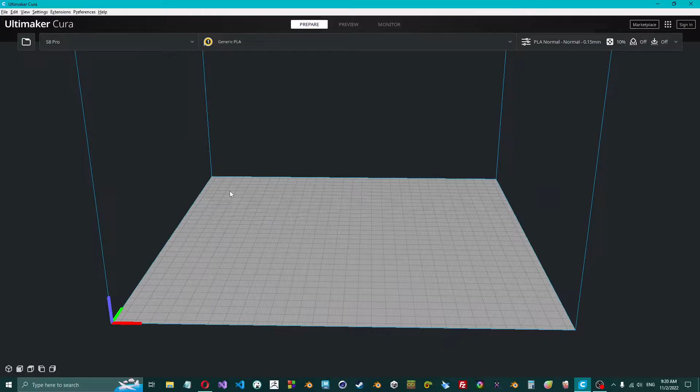So, we're going to go over some tips in Cura to make your prints a little bit faster and maybe to make it more structural. So, let's just load in a generic print that I've done recently. Let's try this little storage container. So, I've got my S8 Pro loaded up here in the left, and we could use this for any printer really. We're just going to use the S8 Pro since we have this larger build platform.

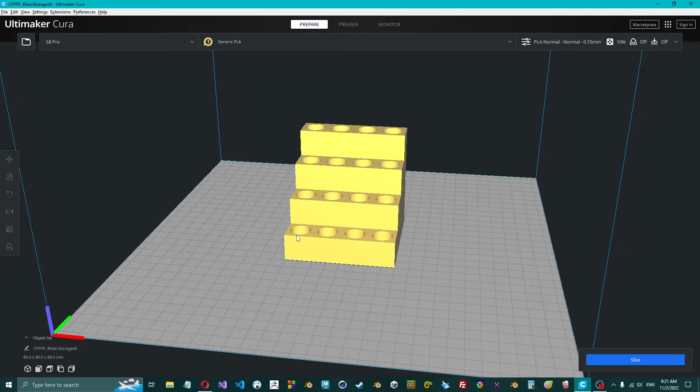So, let's go over some settings first. You might not see all of these categories at first. And so to turn these on, you might be in this mode. You might be in basic. And the thing is, basic is great when you're just starting out. You have a couple options, not too overwhelming. Each category has a couple things to change. You still get different infill options.

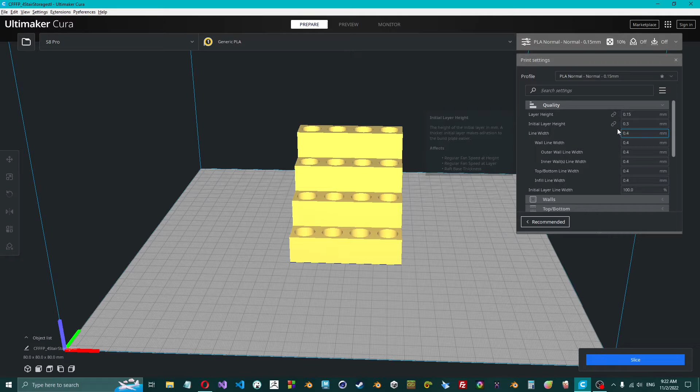This is cool. But if you really want to start printing some faster prints, I'm going to show you how to do that. If you come over here and click all, this is going to give you a lot more modes and options for us to play with. So the first thing that we'll talk about is quality. When you're printing, a 0.2 layer height is about standard. But if you want it to print to where you can fit it inside another piece, or it's going to have moving parts, or you need something where the tolerances are very low, you're going to want to set this down to around 0.15.

Now, I have a 0.4 millimeter nozzle on my S8 Pro and my Aquila C2. Those are both the standard nozzle that comes with them, so you probably have the same type of nozzle I do. You can probably get away with a 0.13, but I would not recommend going a 0.1 with a 0.4. 0.15 is about the lowest that you want to do on a 0.4 millimeter nozzle. If you do want this to print a little bit faster though, we can turn this up to a 0.2.

Let's do a test slice, okay? With just my default, this is in my custom PLA normal, which is basically the standard, but a few things are changed a bit. Okay, so let's slice and see how much. Okay, so 4 hours and 9 minutes. Let's see if we can get this time down, right? So I'm gonna bump up our layer height to 0.2.

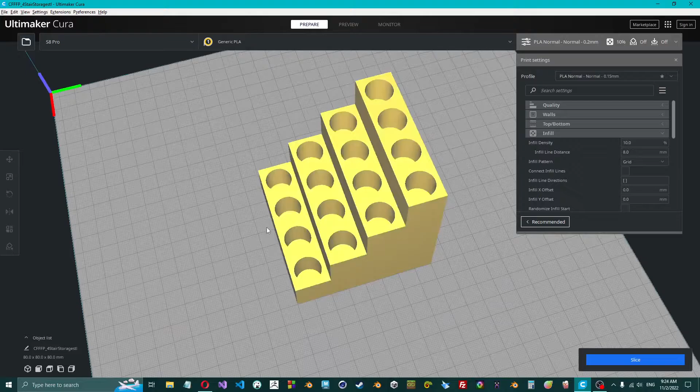Infill. I'm only doing 10% infill, but say we just wanted to see if this was the right size. So let's go down to something even smaller. Let's try a 5% infill. And if you look at this little infill pattern here, it'll show you that the grid, triangle, the trihexagon, the cubic, octet, quarter cubic, cross and concentric patterns are fully printed every single layer. But the gyroid, cubic, quarter cubic, and octet infill change every other one. So they provide a more equal distribution of strength.

So basically, if we want to go as fast as we can, it tells us that we can use this lightning at the bottom. It won't be as strong, but it will be extremely fast. So we're going to choose the lightning fill. And let's check out our speed. So the Sunlu S8 Pro, I found that you can easily print at 85 millimeters per second with 0 issues, no layer shifting, nothing crazy.

You could probably go faster than this. I personally don't like to. I think it's best for the printer if you want long-term usage to keep this down to a reasonable number. The printer comes default at 65. And so this is already about 20 millimeters faster than what it comes at. So just do keep that in mind, all right?

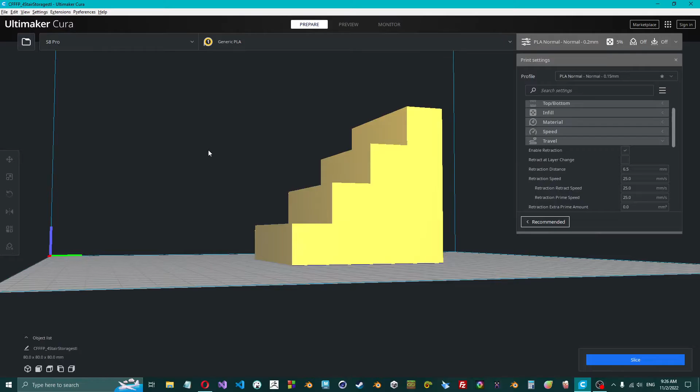In our travel, these are all going to be the exact default settings as what's configured for S8 Pro within Ultimaker. And I'm going to say for the most part, unless you have a printer that is not very common, you're probably not going to want to change these travel modes unless you really know what you're doing and you're trying to get into some advanced geometry that you're trying to build. So we're going to close this again. The cooling, I've got these at just 100% fan speed, as the default has been working amazing for me.

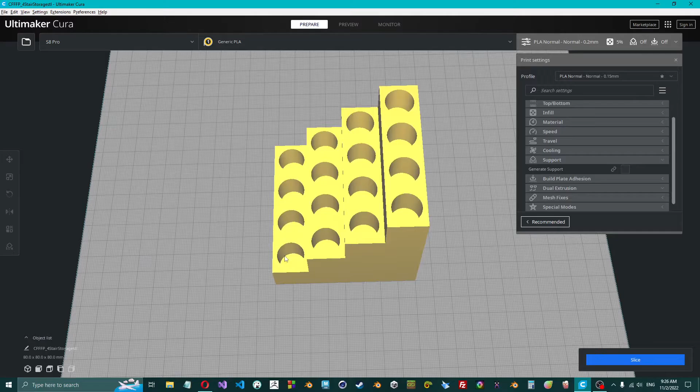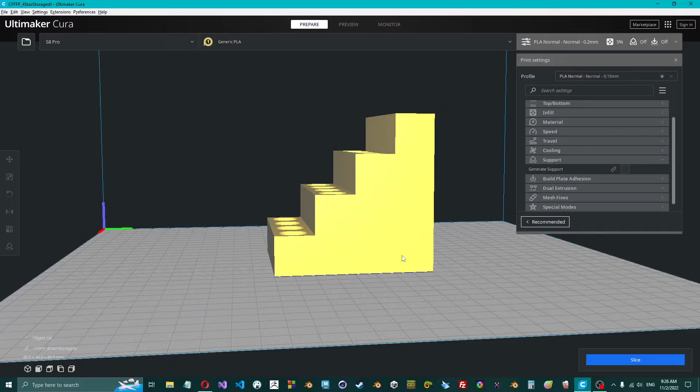Support. So on something like this, support will look for any of these edges that have angles that are less than a certain amount. So if you look here, what's the angle from this bottom to the top? Well, that's a 90-degree angle, and it doesn't have any of these overhangs, right? It doesn't have any parts where the printer would have to build sideways to get out onto it.

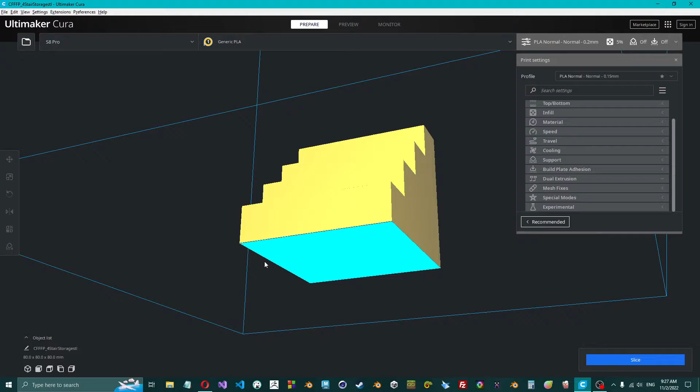So in this case, since everything could be built from the bottom to the top directly, we don't need any sort of support. In fact, since this has such a large surface on the bottom, and this is what you want to think about, the more surface area that you have touching your build plate means that you most likely will not even need build plate adhesion. A lot of people like to do a skirt or a brim, a raft.

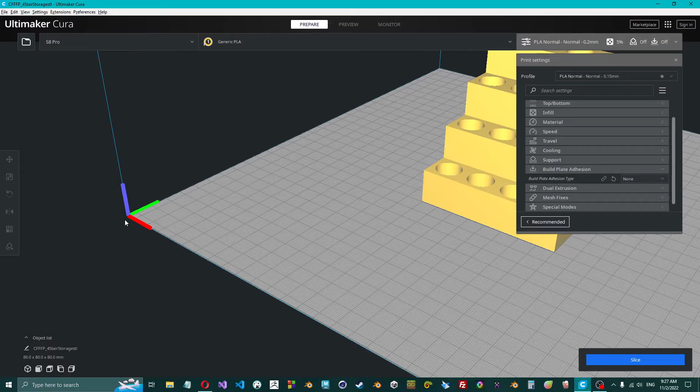I honestly think it's a waste of materials, and you should set up your printer so that your extruder is purging material at the beginning over here, and it's going to move over and start filling your line. Now, if you do want to get in the habit of doing a skirt, that's totally fine. I would recommend one is plenty. But if you have something smaller, say if this was a very small piece, it would actually make sense for me to turn up 2 or 3 skirts on it.

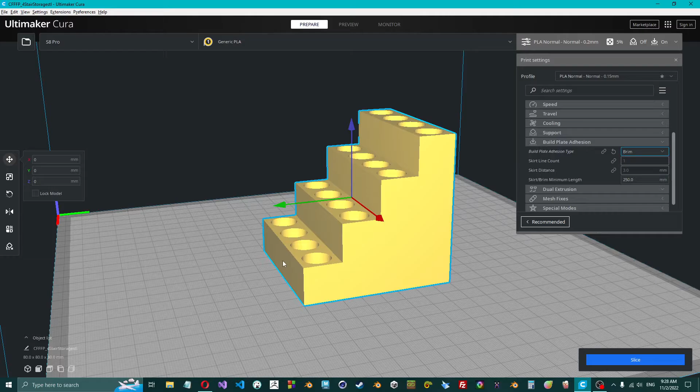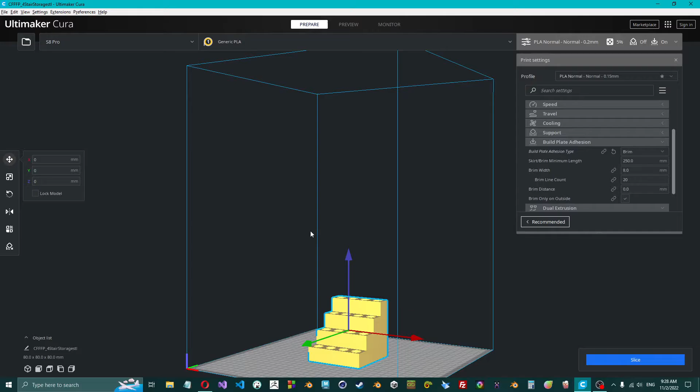Or even if it was going to be a tall piece, you would want to put a brim so that it can add some extra support on the bottom to prevent it from falling over whenever it prints those top layers. Because if you have a very tall build surface, like the S8 Pro has a very tall build platform, if I were to print something way up here and it was very skinny, this brim would have to be huge. This would have to be at least maybe 12, 15 millimeters, possibly more.

Because every single centimeter that you go up in this Z axis, it increases the amount of pressure that is applied from the extruder on your model each layer. So if it hits your print whenever it's passing through, drawing on top, making these new layers, all that force is going to be pivoting at the bottom. And if you've ever used a wrench, the farther back you are on the wrench, the more power you have. So it's the same concept here.

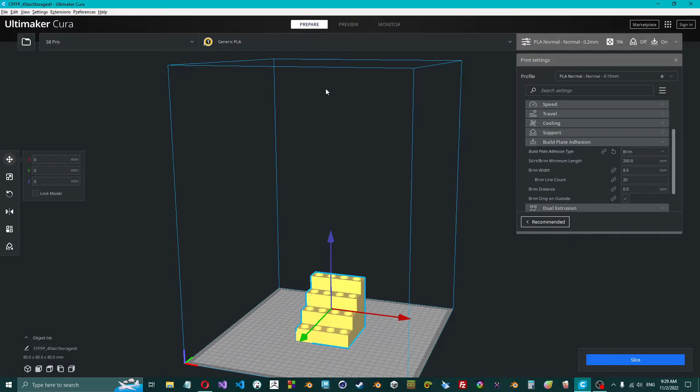But again, in this case, since we do have just a cube-like structure with a lot of build surface on the bottom, and it's fully flat too, I'm just going to completely turn this off. We don't need any build plate adhesion. Now, I don't have a dual extruder, so we're not going to touch these ones right now.

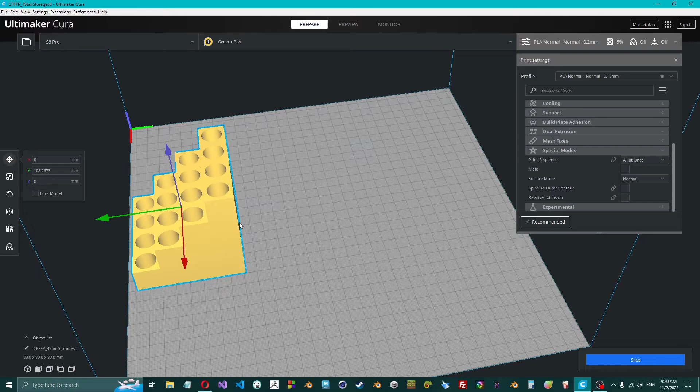Now, the special modes are pretty cool. You can do all at once or one at a time, and this is normally used if you had a conveyor belt setup; you could set it to wait for one, move, and then it would print the second one in the exact same spot. In Cura, it would look like you had one here, and then you duplicated one back, and it prints this one, then this one. It's kind of a weird thing, but it is really cool that they have special modes like this.

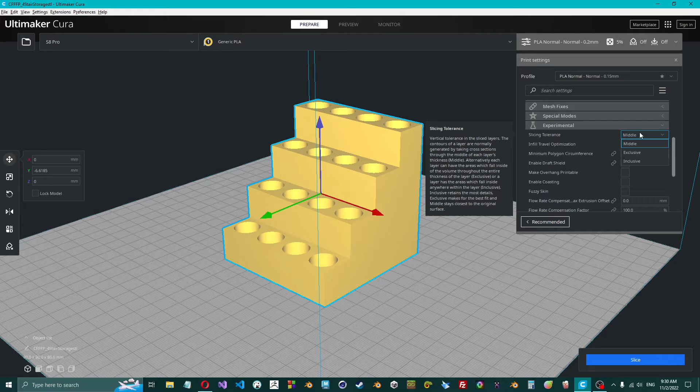And then if we come down here to experimental, I'm just going to say that for the majority of times, you're just going to want to use middle, all right? Basically what this means is whenever you have some edge like this, and say you had another cylinder inside of it, if you take middle, it's going to try to slice it in a way that retains the middle position of the two. And sometimes if you do middle for both parts, it'll make it fit a little bit nicer.

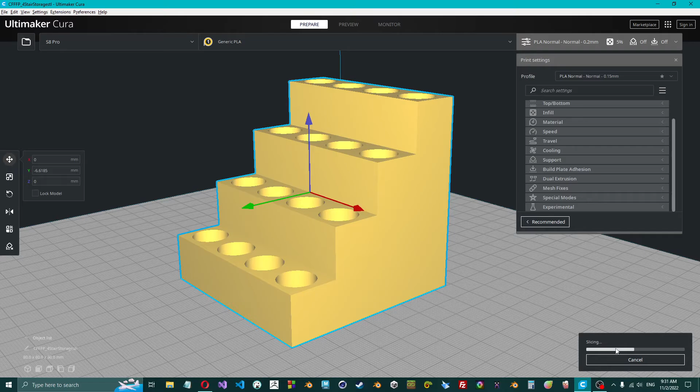Or if you're having some issues with it, what I've found is for the outside part, you can go exclusive. For the inside part, you can do inclusive. And sometimes that'll create a little bit better fit. All right. So let's go ahead and slice this and see how much time we have. Remember, we had about 4 hours, 6 minutes the first time. We just now shaved almost 2 hours off this entire print.

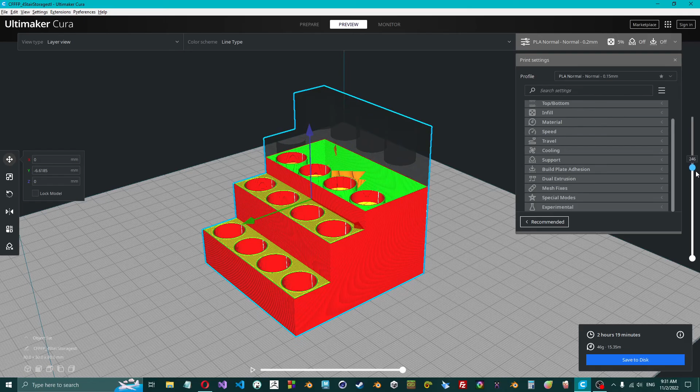Now, if I scroll through this, you're going to notice that the inside is very different because we're using a lightning infill. It's got these crazy looking... it's almost weird to see, but it works, and it does what it needs to. Now, I will say, if you were using this for anything that's going to have weight on it, it could crush with this type of build, with this lightning infill.

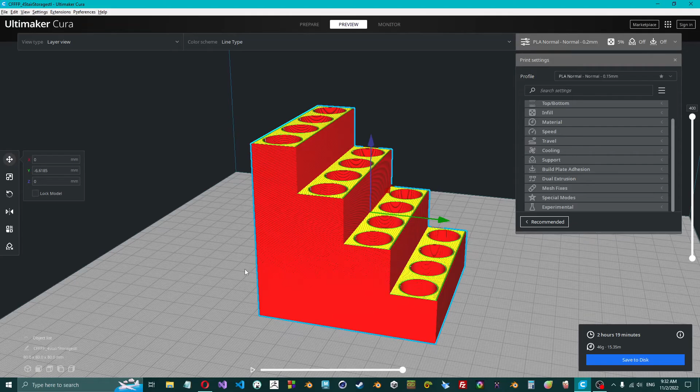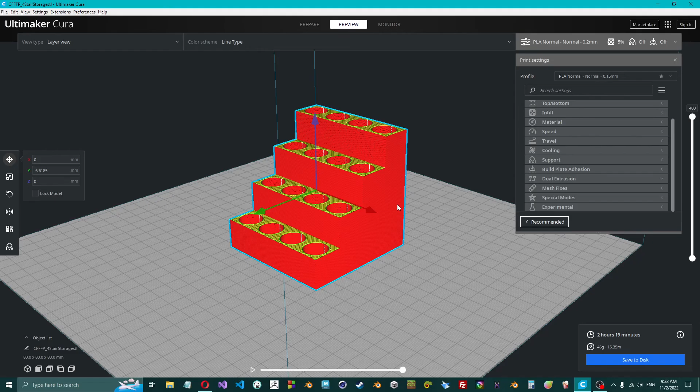But if you want to test sizing and you just want to get it up and going, you just saved yourself 2 hours just to test something. And I think that's a fantastic achievement. So, yeah, I think that's it for this video. We will get together next time and talk about how you can make your print a lot stronger, but still shave off some hours.